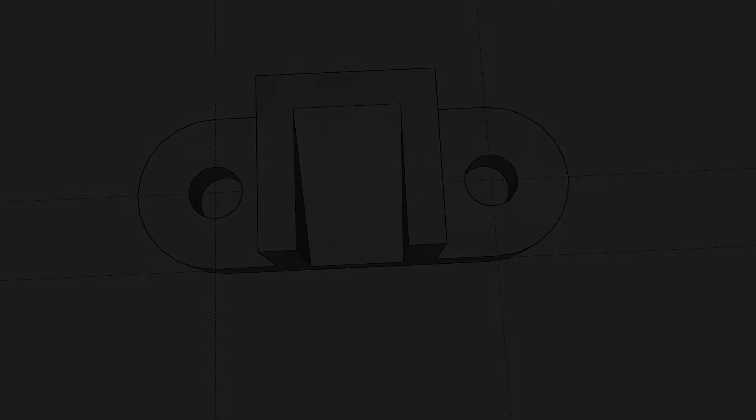CXC Time presents Isometric Projection. Today we'll be looking at this object here. It's part of an engine. Why did I select this? This has in it the isometric circle that I explained in my last tutorial.

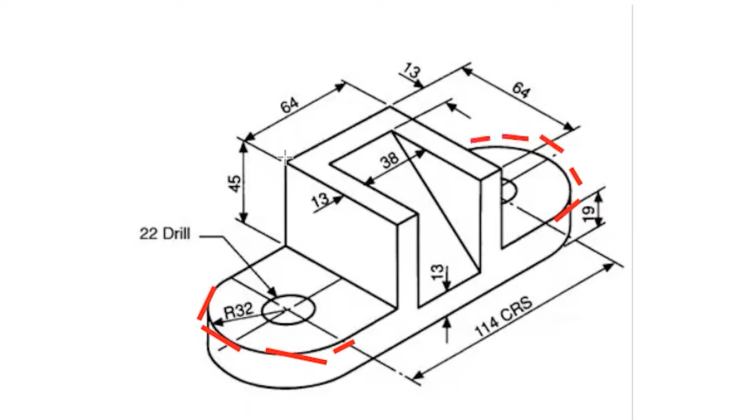So that's what I want here, right here along this, some circles there, right here, which are the same circles. And it has in some straight lines. So it's a good mixture to practice on, let's put it that way. It has in the curves and then it has in some straight edges. Let's analyze this and see how we are going to draw this.

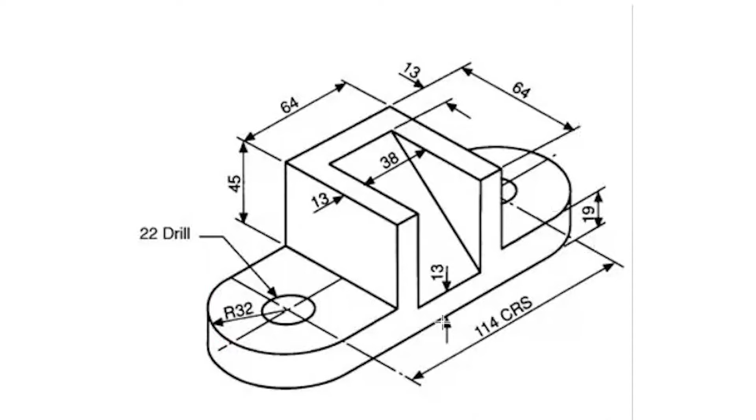Because the first thing when I'm creating isometric drawings, I like to create an isometric box first before I try tackling the actual drawing. So in creating this box, what do I need now? I know that from this point here up to here is 114 millimeters, and then I'm just going to add 32 because the radius here is 32, so that means the radius at this point is also 32. So we're going to add on 32 there, and let's see what that gives us.

So I'm going for my calculator. 114 plus two 32s, which are 64. So that's going to be 178. That's our distance. And let's go now and go up and see how much do we go up by. Well, we know we go up by 19 so far. And then we add 45, which is back here. So it's 19 plus 45. I got the 19 from here, and I got the 45 from back here.

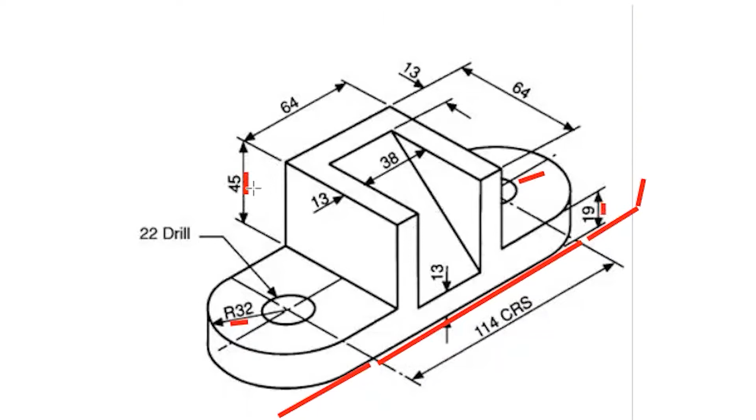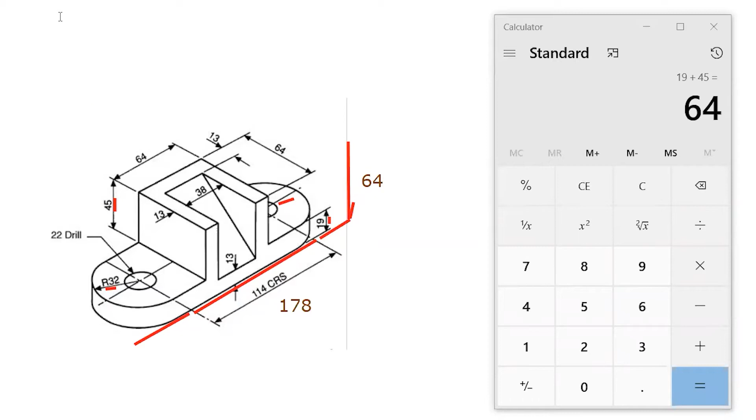So let's clear this and let's add this and see. So first let's record this number, 178 there. Let's clear over here and let's add 19 plus 45 and we get a total of 64. So we're going up some distance, 64. Let's put a text there and call that 64. Okay, so it's going to help us because if we can just draw the isometric box first, it actually helps us to create the shape.

So last thing we need to know, how wide is this box? And right here I have all that I need to know. It is 64. I could have also gotten that from here. The radius is 32, because when I open my compass to here, it's going to be 32, and likewise when I open my compass to this point, it's also going to be 32. So 32 plus 32, we get 64. So over here is going to be 64, and I'm just going to draw down there, connect that. Go down there, connect that.

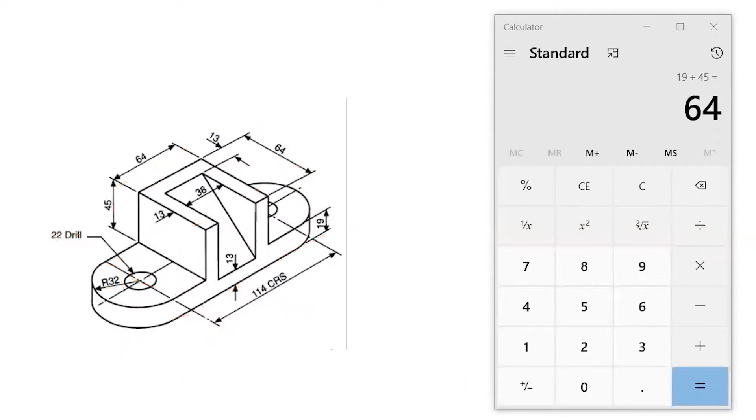So this is what I generally do before I actually start drawing. I actually break down my drawing, put it into a box, understand my drawing first, and then I work from within the box. So I'm going to be drawing a rectangle, which is going to be 178 by 64 to create the face. And then I'm going to be extruding that 64 millimeters deep. So let's go over to AutoCAD now. So before I do this, I'm just going to clear this drawing. Remember those numbers. Those numbers are fairly easy to remember. 178, 64 twice. Okay, good.

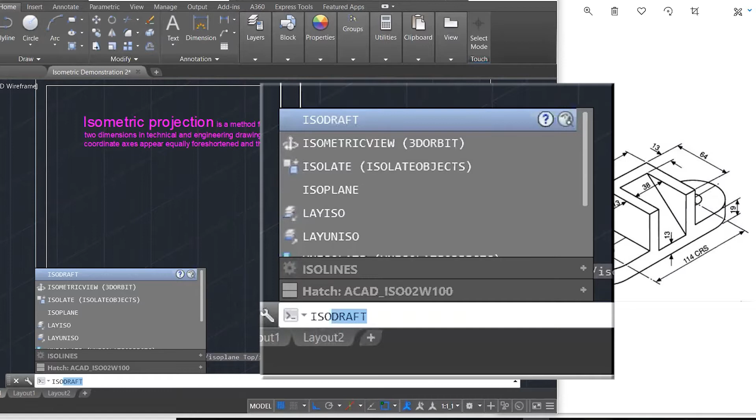Let's turn on our isometric mode. You'll find the isometric mode here. It's called isometric drafting. I'm going to turn that on, and I'm going to turn that on to my right side because I want to draw my right side first. Guys, if you can't find your isometric mode icon on your screen, you can always type the word ISO and it will come up ISO drafting, ISO draft, and that's how you can actually turn on these same options that I've just turned on by using this arrow. Okay, so let's get straight into this now. I'm going to make sure I'm on my construction layer first before I go any further. And then, yeah, I'm all ready to go now.

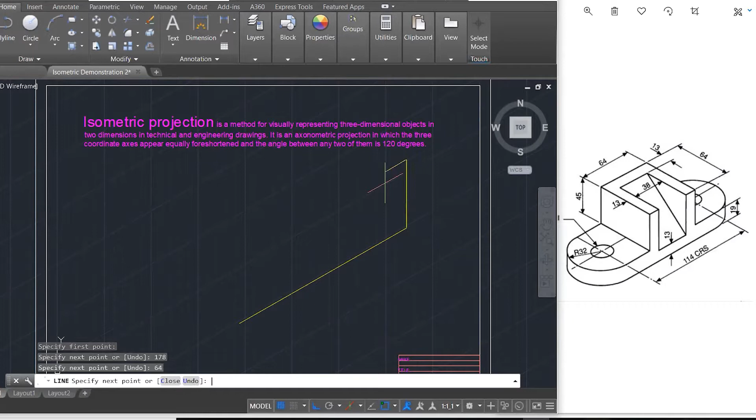178 is my length. And I go up 64, come back 178, and down 64. Okay, so now that I've created this, I'm going to move it because I think that this is going to be too close. Yeah, that looks good there. And one thing I can do is I can just set this back up, draw a line. Oh yeah, I need to change my direction now. So I'm going to go over to left, draw a line that says 64. And what I'm going to do is to make my life easier, just copy this over to that point there.

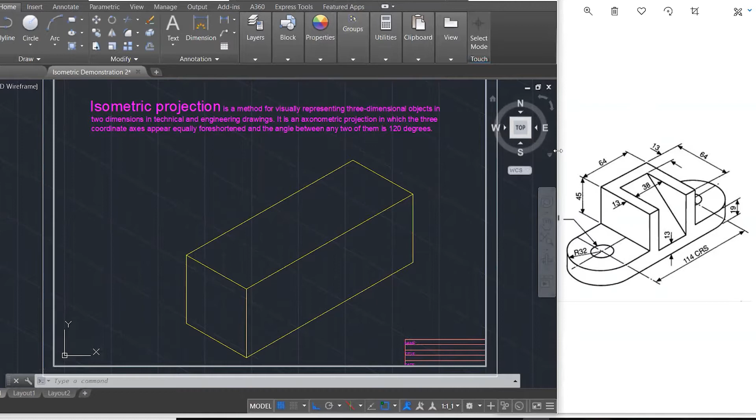Oh man, I'm missing today. CO for copy. Grab it here by this point and shift it over to that point. And that's how we get our box. So this is our box, and I'm going to remove the lines that we're not going to be able to see because of the hidden detail, right? And that's our box to start things off. So far, so good. I hope everyone is able to follow how I've gotten that.

Okay, so what's the next thing I'm going to do? Let me go over here, grab my pencil, and start drawing. I'm going to work on this point here.

I'm going to come up 19 from my baseline. So this is my baseline here, I'm going to go up 19. Let me get back over here and draw 19, up.

I'm going to keep switching between the left, the right, and the top view as I'm drawing, so sometimes I might not remember to tell you to switch. Just pay close attention, I'll try to remember.

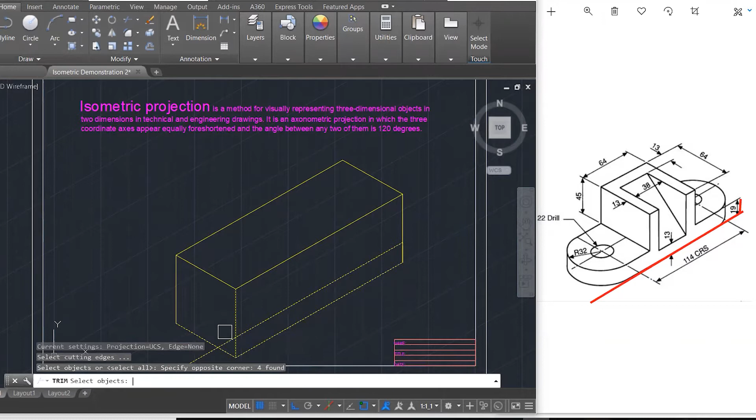Okay, so that's my 19 there. Again, I need to switch the side now to the left. And that's my 19 there. So I've put in my 19 line all around, so I know where that is.

Okay, what I need to do now is start putting in my circles. I am going to do the circles on the outside as a separate item and then attach them to the rectangle here. So what information do I need to know to draw my circles? I need to know this number here, radius 32.

Radius 32. So when an isometric drawing is given and you see radius 32, how do we take this information and get the circle that you desire from just one piece of information, radius 32? Well, we need to create a square that is going to be 64 millimeters on each side. How did I know that?

Let me explain this. Let me go over to a different color, I'm going to use green. This is my axis for my circle right here. From here to this point is 32, and from here to this next point is also 32. So the diameter of this circle is 64.

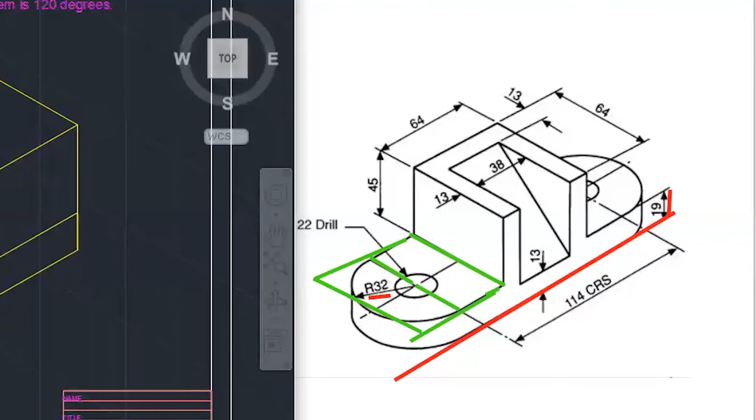Okay, so let's come over here and do that. I'm going to create a box out here, which is 64 by... I need to switch over to my top view. Okay, 64 by 64 by 64 right here. Okay, so I've gotten that pretty easy.

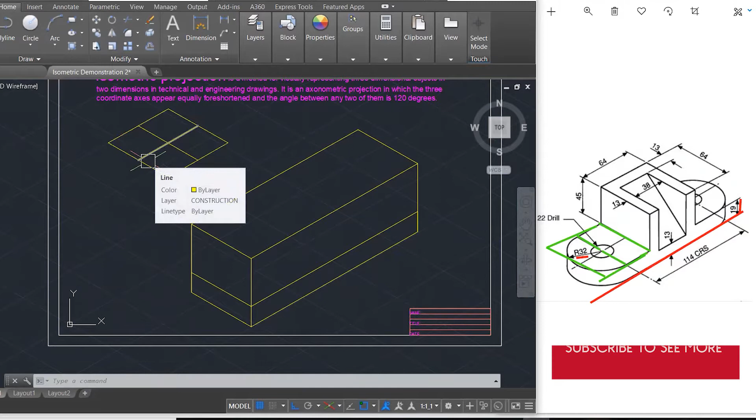Now I'm going to divide these faces. Guys, I'm not going to really explain this part in depth because I made a tutorial about this, how to create an isometric circle. I suggest you check that tutorial so you will be able to understand this better. I'm just going to be moving through this part now, assuming you've watched the fundamental tutorial before watching this.

So this is my longest diagonal from this point here to this corner point. And what do I do now? I come from this lowest point to my midpoint here, and I go from this corner point to this midpoint here. So I've created my grid.

Next thing I need to do is switch over my layers because I want to be on my text layer. I want to place some points where I'm going to be using. So I'm going to place a point there, 2 points on the inside of the square and 2 points on the outside of the square. Now these points aren't just any random points, they have been calculated, and you will see when I start to draw my circle now.

So I'm going to switch back over to my construction layer, and I'm going to proceed to draw my circle. So I open a circle, come to this boundary point here, open a circle up there, open a circle here, open a circle there. So I've gotten my face.

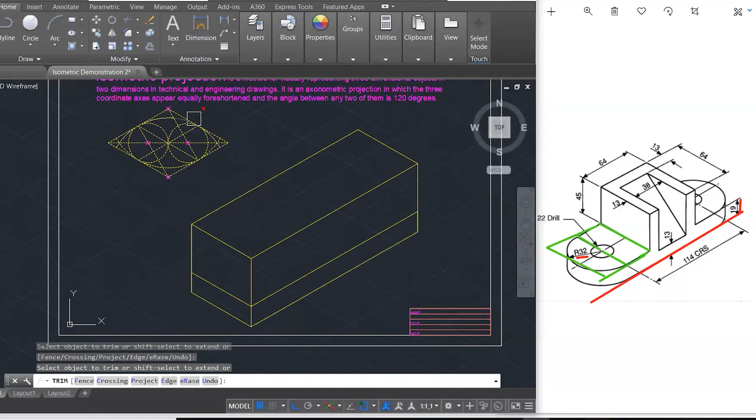Now it's time for us to trim. Trimming the inside bits down, and the points that you can't trim, it's best to just delete when you're finished. So that's my isometric circle done.

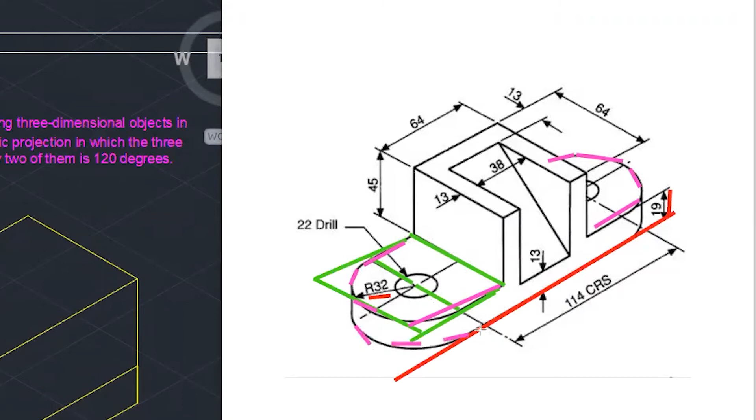And the good thing about this circle, if we come back over to our drawing and look at this, we can realize that we've just done a whole heap of work by just doing that one circle. Because this one circle appears here, right here, it appears here, and there. So these are the two, and then it appears down here also, down there. All right, I think I can clear this now, because that one circle I just created would be able to be copied 3 times or placed 3 places, so that's one piece of work just done.

Now let's create the second circle. While we're creating circles, they tell us 22 drill. Now what would I do with that information? Well, we can assume 22 is the radius, or we can assume 22 is the diameter. That's how we have to approach this. Looking at the proportion, I would say 22 is the diameter. So that means we build this circle at 22 millimeters. We don't have to do any calculations or add 22 twice or anything.

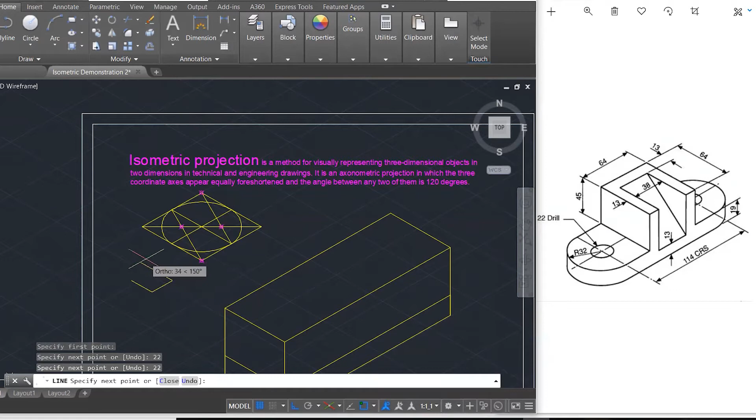I'm just going to create my square, and I'm going to do the same thing that I did in the previous example. Divide the square into 4 pieces. Find the longest diagonal and draw a line through the longest diagonal points. And the points that weren't used yet, which is this point down at the bottom, attach a line to the midpoint up here, and from this to that point.

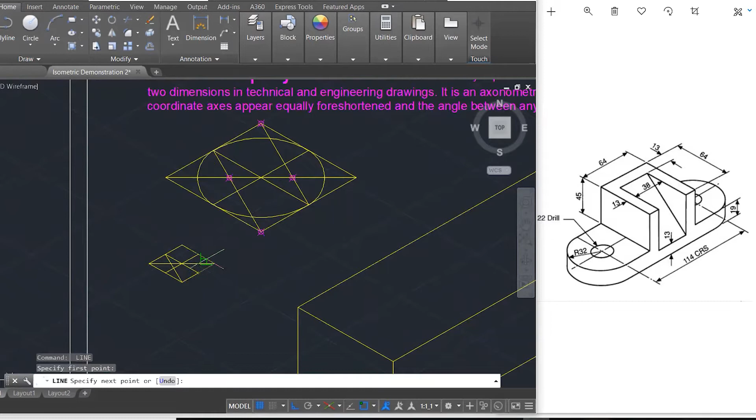So now I can C for circle, open to there, C for circle, open to there.

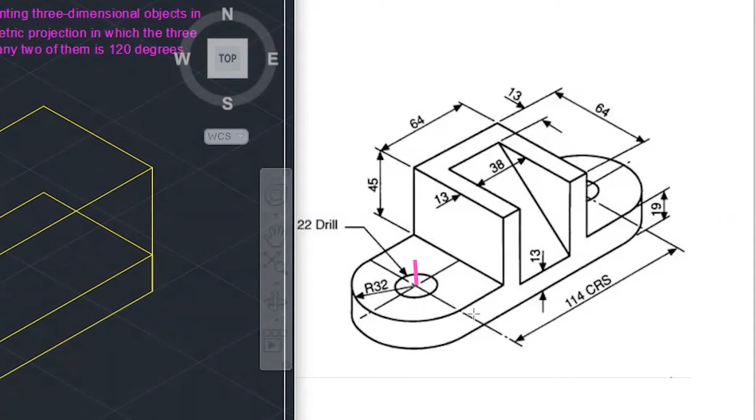And when I say center, what do I mean? This point here. I need to find that point there. How do I find that? Well, we know the whole length from here to here is 178. So what I need to do is step in 32. So 32 is about here.

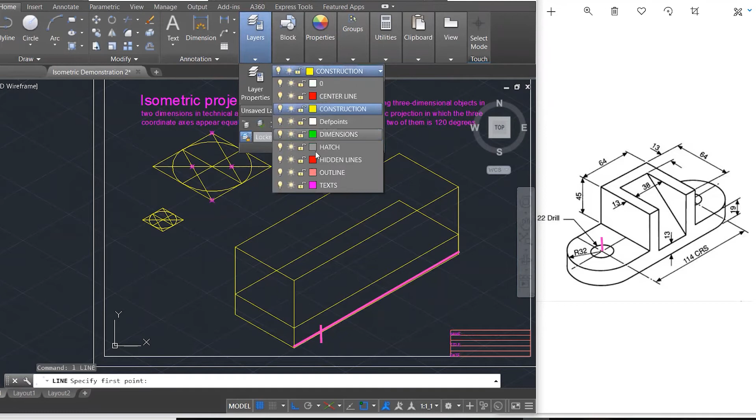Yeah, so how am I going to find that now? I'm just going to draw 32. I'm going to go over on another layer, my outline layer, so that as I'm drawing on my construction layer, you guys will be able to see where the 32 mark is. Right there, that's my 32. And I just bring it across. So you can see, here's my 32. Let me just clear my drawing now. Good, you can see this is the line I used to indicate where 32 is.

Now I'm going to come and draw a line from my midpoint here through to my midpoint at the end of my rectangle. And I'm going to find my 32 down here also, coming from this corner, by drawing a line. So now I know where my axes points are. Let me place a point there so I would always be able to find them. I'm going to go to my text. That's a point that goes there, and that's a point that goes there.

Good, perfect. I can actually put these lines now in my construction layer because they've served their purpose. Let's put them in construction. Let's remove these because we no longer need them. So what am I going to do next?

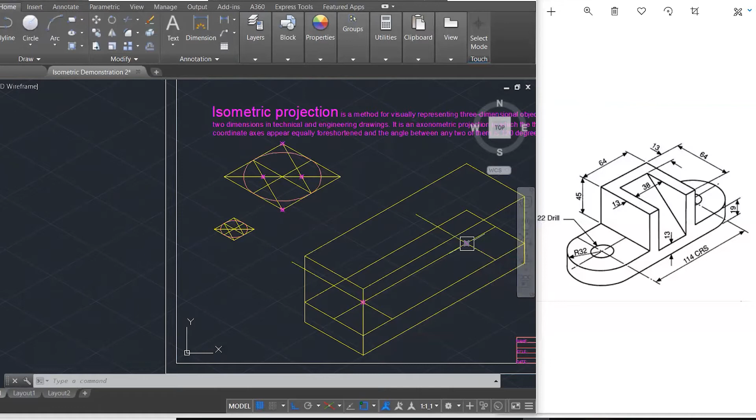So I'm going to be moving the circle from the middle to here. Let's do that. Select all the curves that make up the circle. CO to copy, that's a command. Midpoint, snap there, grab it by its midpoint, and snap it in here at the midpoint. Then snap it in at that midpoint there. So my 2 circles are in. Yay, feeling pretty smart about that. Like I said, a whole heap of work done just by being able to insert those.

And now I'm going to place my bottom circle in. What do I mean? I mean this circle around here. Yeah, I'm going to put that in, and then this one also. Okay, so let's do that now. The first thing I need to do is select my circles. To select multiple things, I hold down my shift button while clicking. Okay, good. So I'm going to move it from this corner point here.

I'm going to copy it, CO to copy, and then I'm going to snap here as my base point, and then just bring it down here. Yeah, good. That's done. Now this is where the fun begins.

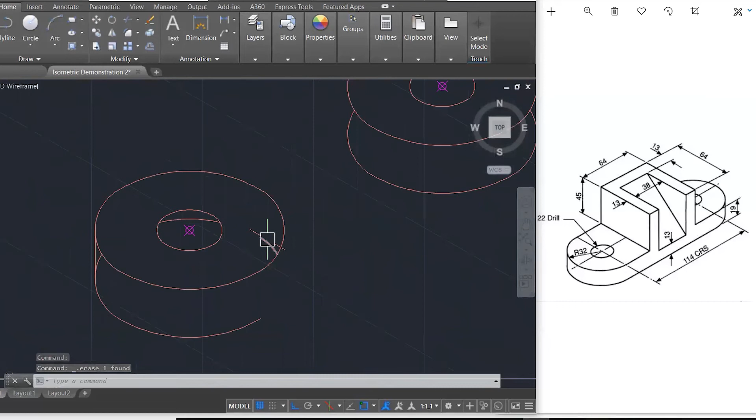And just remove other lines now that I don't need. So I'm going to trim it again because I've now inserted my tangent line, and there are some lines that need to go. Yeah. Yeah.

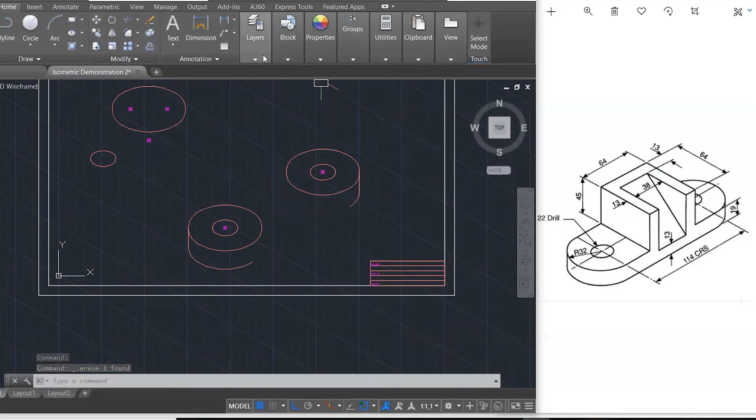All right, so that looks good so far. This line definitely goes - that goes, but you're not going to see that. Okay, all right, let's turn back on our construction there and see what we have here so far. All right, cool, pretty good.

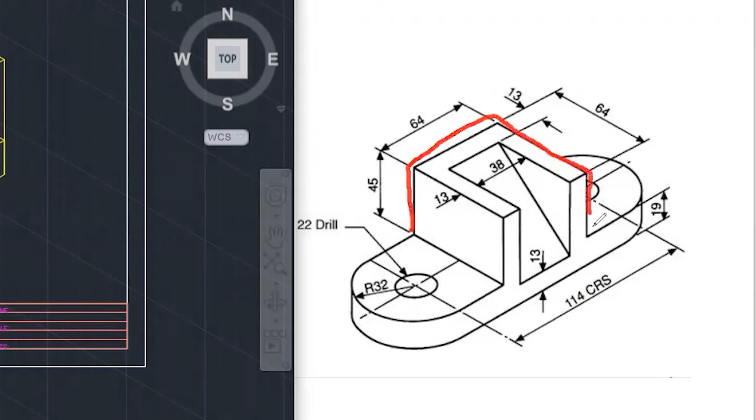Now what we need to do is start tackling this thing here. You need to come up, you need to tackle this part now. Yeah. How are we going to tackle this?

Well, you can see that this fits dead in the middle of this whole object, so we need to find our midpoint. From our midpoint, we know that this whole thing is 64. So we find a midpoint somewhere along here, and then we offset to the right 32, and then to the left 32 - that's what we do so that we can locate the boundaries. So I'm going to do that now.

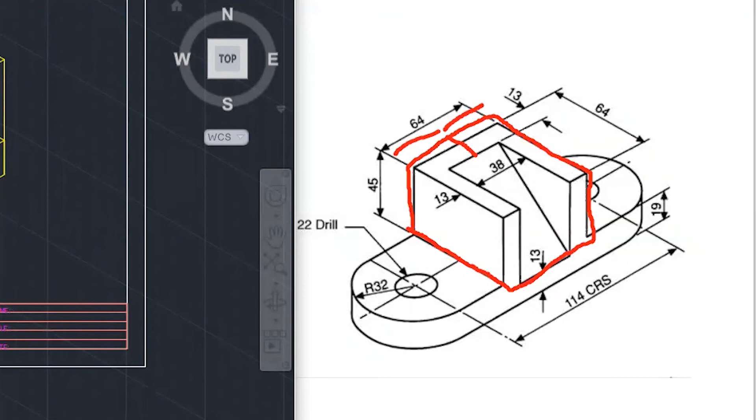Let me just clear this drawing, and I'm back here with you guys, back in AutoCAD mode. All right, so let's find the midpoint - L for midpoint, L for line, sorry. This is the midpoint here, and I come up to that midpoint there.

Good, so now I'm going to draw across on this face. I'm going to go a distance of 32, and I'm going to bring 32 out, then that's 64. Yep, start from the midpoint again, go to the left 32, and come out to that, and 64.

It's pretty confusing at this stage, but just bear with me and you should understand this. So what am I going to do to make this slightly easier? I'm going to transfer these midpoints here that I used and put them on a different layer. Let's put them on center. Yeah, so first thing, get rid of those.

So those are the midpoints that I used to locate the axis of the circle - those go on the center layer. That takes care of that. And now, do I need this line back here anymore? No, I don't need that.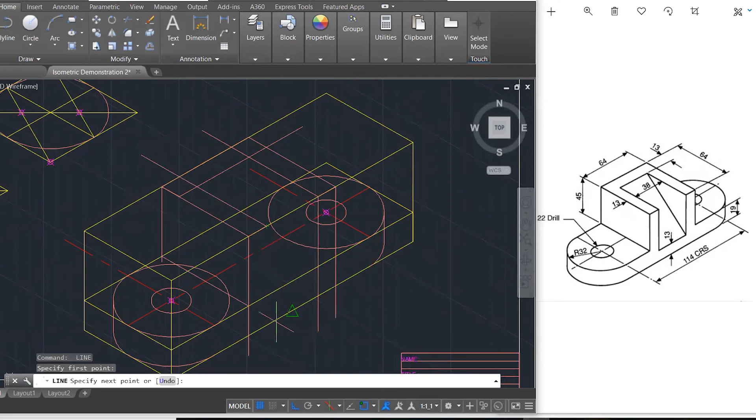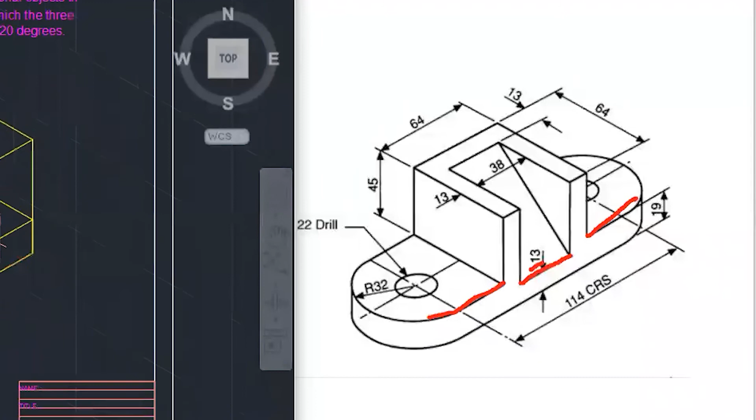And interesting, down here at the bottom is also 13. Let me just highlight that down there. So the distance between here to there is 13, whereas up here and up there, that's 19. So there's a slight difference. This is getting a bit confusing. So what I'm going to do is just start trimming this now so that I don't lose anyone at home. Okay, good. So let's trim.

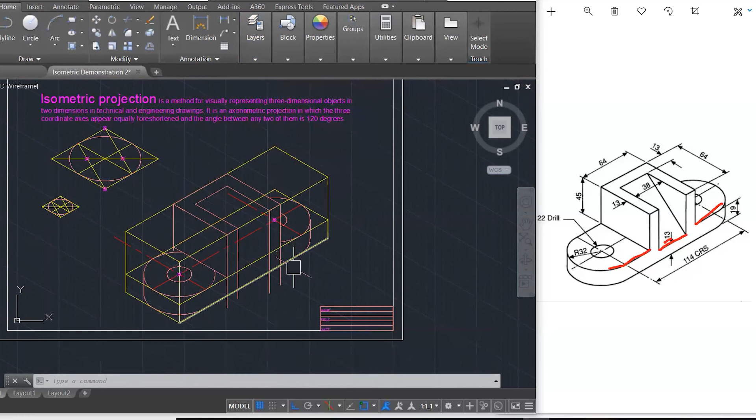So the first thing I notice is that I need a line that connects. I need a line from this point here over to the tangent. Perfect. I also need a line above here over to there. Perfect. This goes up. Delete.

Right. I need to come up 13. Yes. So I need to switch over to ISO plane left and draw a line, as usual, go up 13. I don't think I did that properly. 13. At that point, yes, switch the mode over to ISO top and just click over like that. Yeah, so now it's time for another trim. So I'm going to turn off the construction layer at this moment, and I think we should be able to trim.

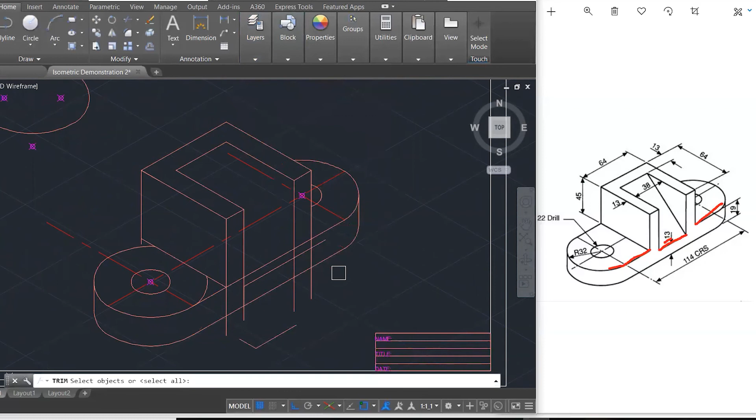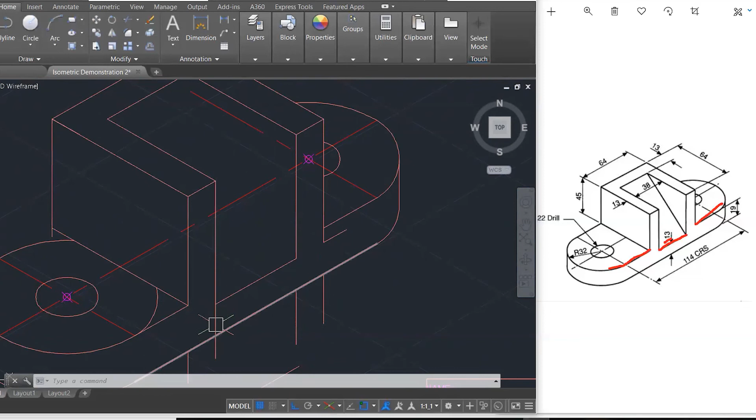So guys, this thing is a series of trimming, turning back on the construction layer, looking again, trimming, turning back off your construction layer, and so forth. Alright, so it's a lot of back and forth. Sometimes another tool you can use is fillet. Like I'm going to fillet this junction to that junction and this junction to that junction. So to clean up some corners, I'm just going to use my fillet tool. Now I'm going to delete these lines that I don't need.

Okay. So what's missing? Let's clear the drawing and look at things that need to be added at this point, and let's draw them in. What's missing? This line needs to go in. That's really easy. I need to attach this line here to the circle, make a tangent there. I need to delete this line here. Yeah, that line needs to go, and these two lines need to be put in. Okay, so let's clear the drawing and let's get to work.

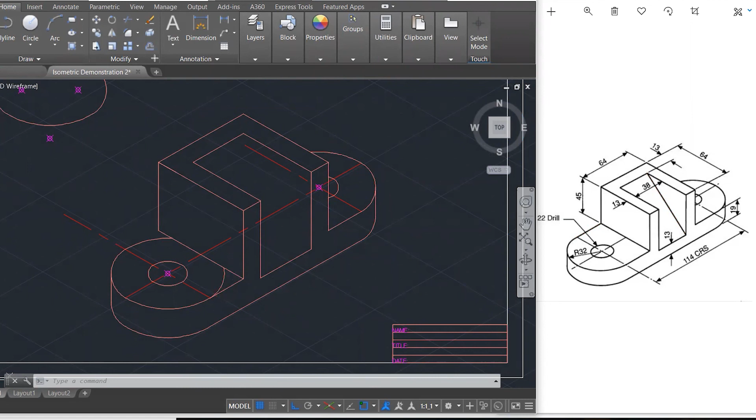First, put in this line. That looks good. Second, put in this line here, put in this corner. To there it says tangent. Nice, nice, nice. Let's delete this. Not needed. Sorry. No line. Delete that curve. And I think I'm finished. Yeah. This is what it is. This is the final product.

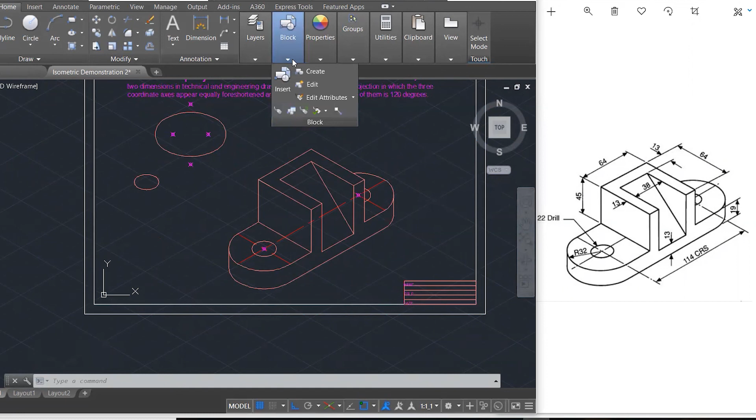Let me just turn back on my construction layer. So to make sure that I'm within my box like I started off. Yeah, so this is the box here that I started with. Again, the box was 178 millimeters. Let me just put that dimension on for you guys that might be following.

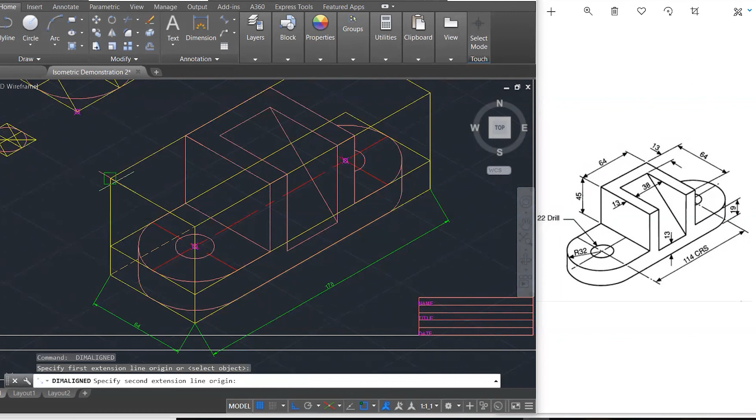Okay, right. I need to use an aligned dimension. So where would I find that? In the dimension mode, go to aligned. Let me just switch over to my dimension there. And now I'm going to start. So my box I started off with is 178 by 64, and the height is 64 also.

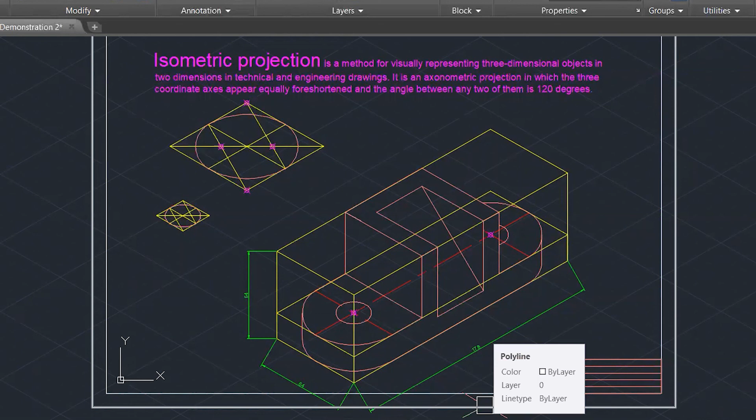So let me just remove this drawing and look at this thing's totality, maximize the screen, and we can look at this at the end. And this is the final creation here, or the final construction. You just do that, and you just flash this back up. So this brings us to the end of our tutorial.